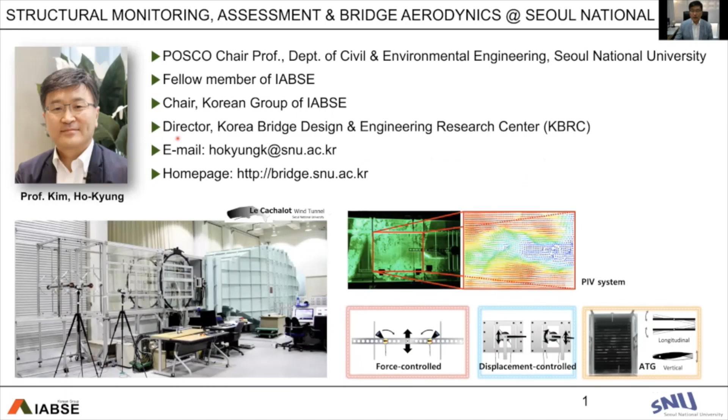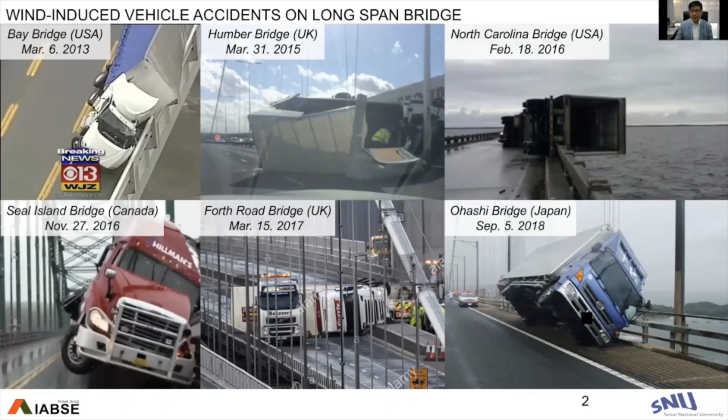Wind-induced vehicle accidents on long-span bridges were identified and observed in many countries. A couple of years ago, Typhoon Jebi struck Japan and rollover accidents were observed at the time.

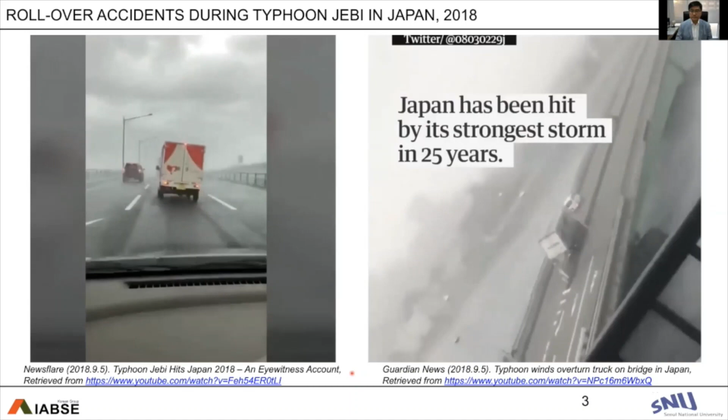The same rollover accidents were also observed in Korea. On the left-hand side, you can see a couple of accidents with a 1 hour interval at almost the same place along the bridge.

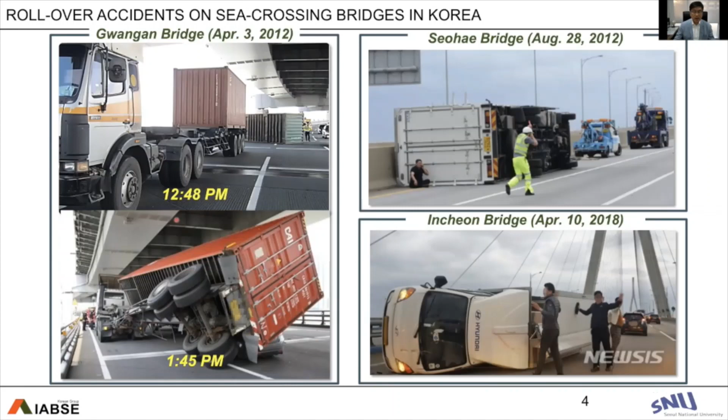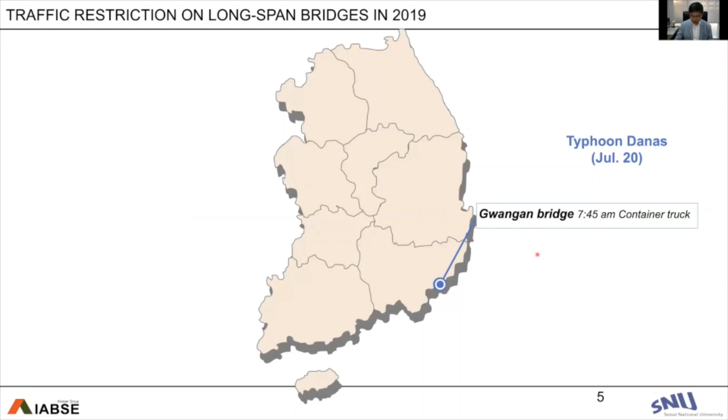Last year, many typhoons struck Korea. In July, due to Typhoon Danas, Gwangan Bridge was temporarily closed. In September, Typhoon Lingling invaded the Korean Peninsula, and the western side coastal area, where there were many long-span bridges, the bridges were closed and reopened as the typhoon moved up to the north side.

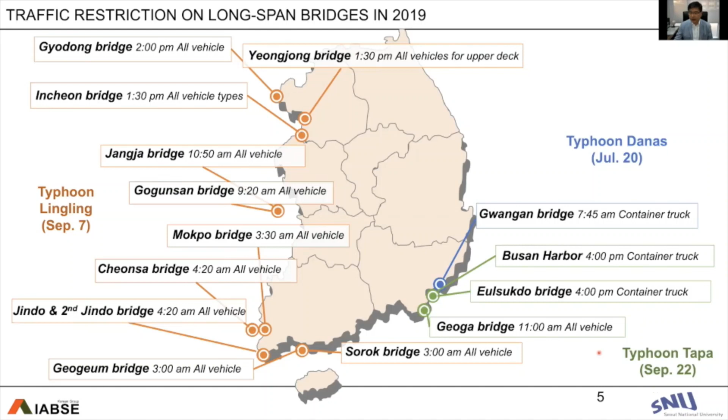Also in September, we had another typhoon, Tapa, in the southern and eastern area of the Korean Peninsula. 10 days later we had one more typhoon, Mitac, and Ulsan Bridge was temporarily closed at the time.

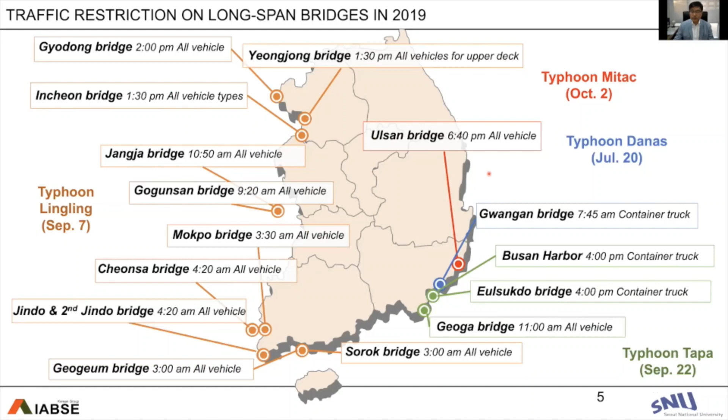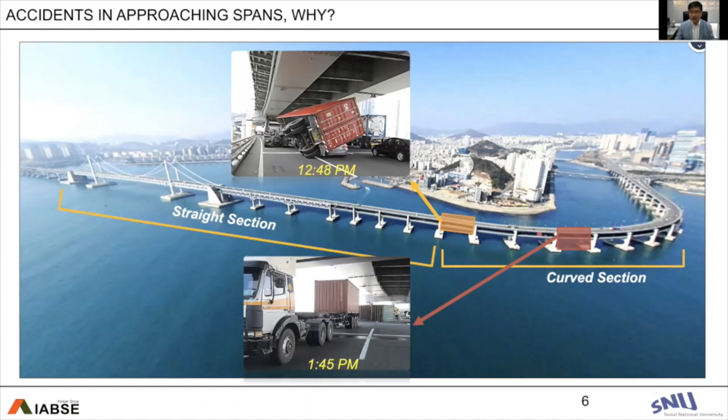The interesting point was that the accident was observed in the approaching spans, not the main span. Also, the accident events were observed in the lower deck, not the upper deck. So that was our motivation for this research, and we would like to provide some framework for vulnerability assessment of vehicles under strong winds.

We implemented 3 research items. The first is wind tunnel testing for measuring aerodynamic coefficients. The second is determining critical wind speed via vehicle simulations.

We would like to obtain critical wind speed curves for each wind direction. For example, in this specific case, you can see the vehicle is most vulnerable to wind from the west direction, with a critical wind speed of around 18 meters per second.

By this way, we can obtain wind speed thresholds for traffic control based on this critical wind speed curve.

The last item is wind environmental analysis. We obtain long-term wind speed data and also develop long-term probability distribution functions. By combining this information with the critical wind speed curve, we can determine a vulnerability index, N subscript E.

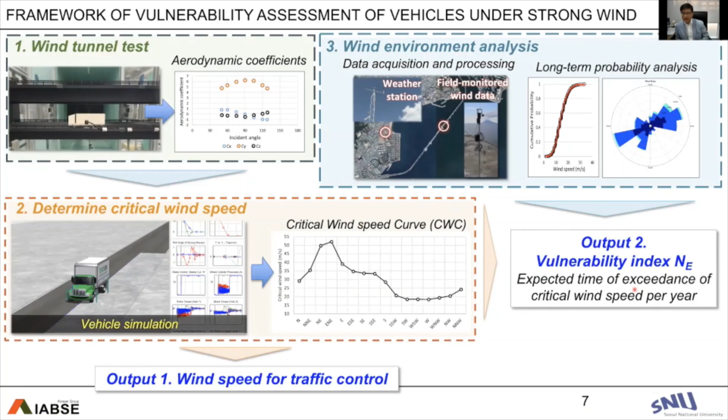This is the expected time of exceedance of critical wind speed per year, which is a sort of risk index.

The Gwangan Bridge provides a total of 8 traffic lanes: 4 lanes on the upper deck for westbound traffic, and 4 lanes on the lower deck for eastbound traffic.

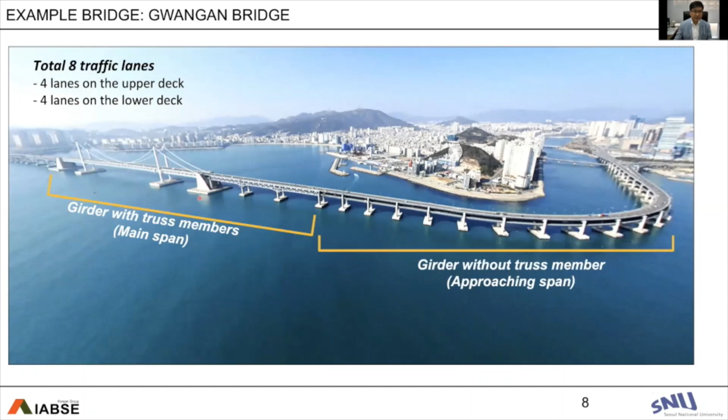As you can see here, the approaching span girder is without truss members, while the main span is equipped with truss members between the upper deck and lower deck.

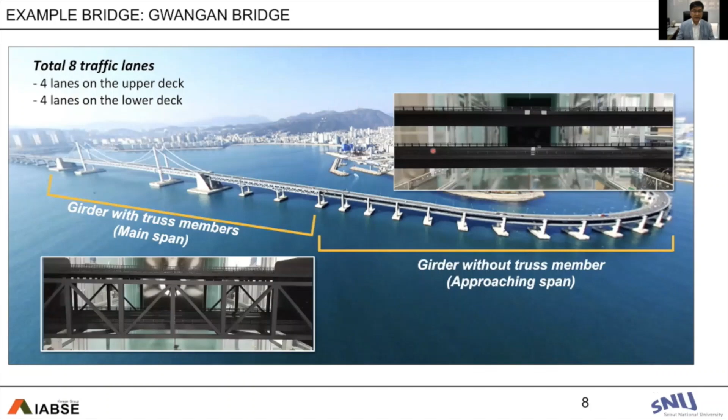For the wind tunnel test, we developed 2 different section models.

Let me talk about step 1, the wind tunnel test to measure the aerodynamic coefficients of the vehicle. We developed a new system so we can rotate the cross section of the bridge deck to control the incident angles.

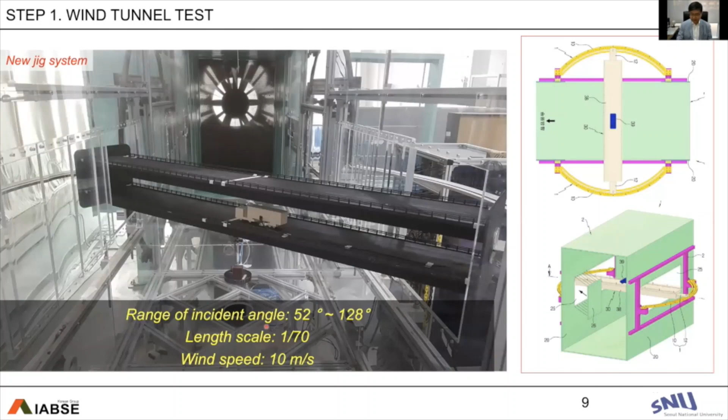By installing small load cells inside the vehicle models, we can measure the aerodynamic loads, 3 forces and 3 moments. Then by changing the incident angles, we can develop aerodynamic coefficients for these specific bridges.

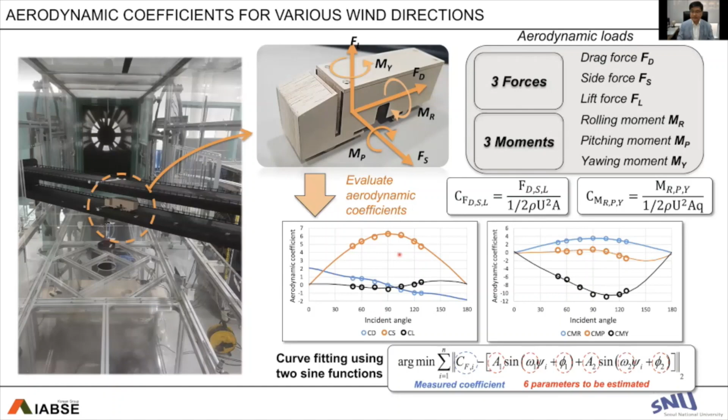This shows us the experimental results of the aerodynamic force of approaching spans, the vehicles on approaching spans. For the upper deck, please note that the dotted line here is the aerodynamic coefficients for the flat ground condition. You can see side force and rolling moment. The level of the aerodynamic force is almost similar to the flat ground condition.

How about the low deck? The low deck is somehow different. The aerodynamic force coefficient somehow increased due to the tunneling effect between the gap, the small gap between the upper deck and low decks.

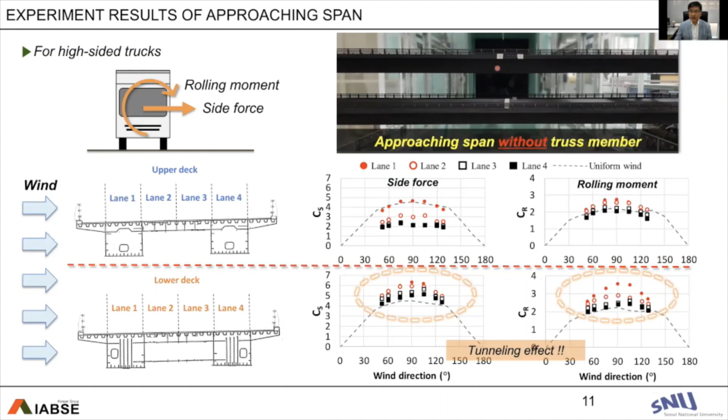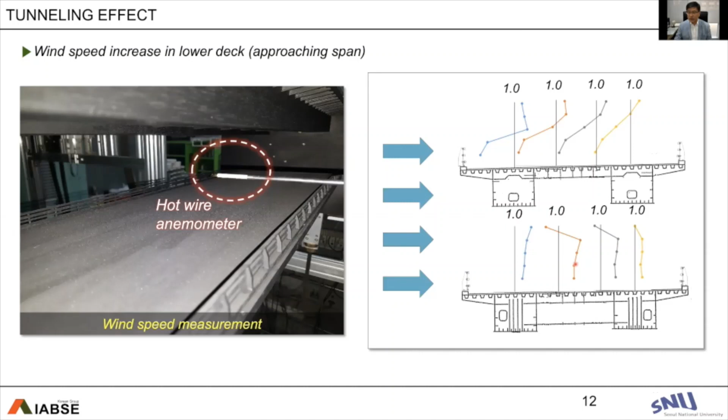We also tried to measure the increased wind speed between upper deck and lower deck using hot wire anemometers in the wind tunnel test. The vertical line denotes the undisturbed wind speed. You can see here on the lower deck, most of the lane, the wind speed was somehow increased.

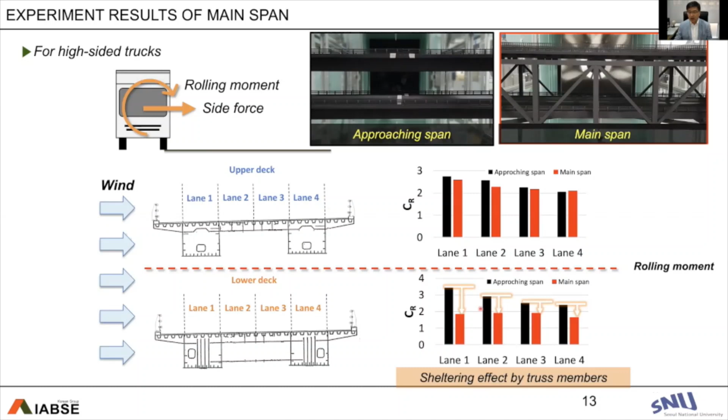We also performed the experiment for the main spans, and you can see the truss members somehow equipped between upper deck and lower deck. For the upper deck, the approaching span and main span provide almost similar aerodynamic coefficient, but for the lower deck, you can see here, main span, the aerodynamic force was pretty much reduced due to the sheltering effect by truss members.

With these measured aerodynamic coefficients, now we can estimate critical wind speed. So we consider two cases of accident: one is overturning, and the other one is side slip.

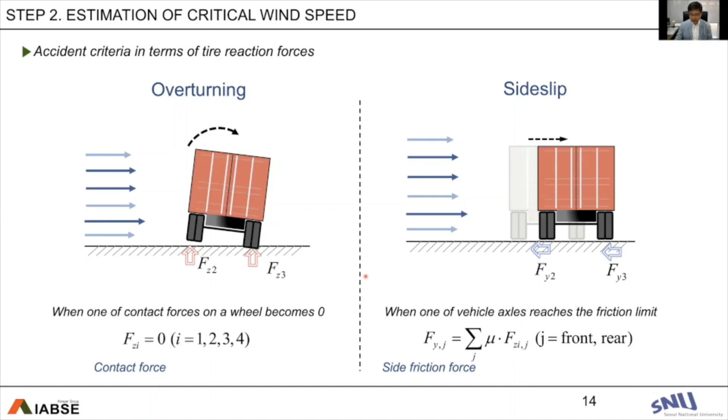Overturning is assumed when one of the contact forces on a wheel becomes zero. Side slip is assumed when one of the vehicle axles reaches the friction limit. So what we need is tire reaction force to check this accident, and for that we need a vehicle dynamics model.

We consider the first model as a quasi-static vehicle model. With this model, we can calculate the tire reaction force from the equilibrium equations as shown here, combined with geometrical constraint.

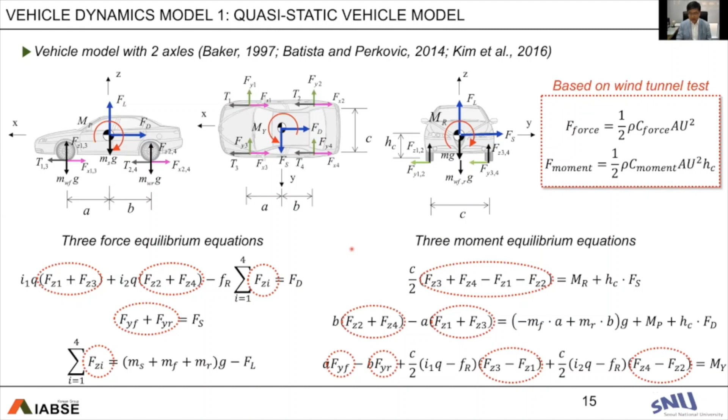The other option for vehicle dynamics is simulation using TRUCKSIM. TRUCKSIM is one of the commercial softwares which deals with vehicle dynamics. By combining it with MATLAB Simulink, we can develop the vehicle motions with these proposed procedures.

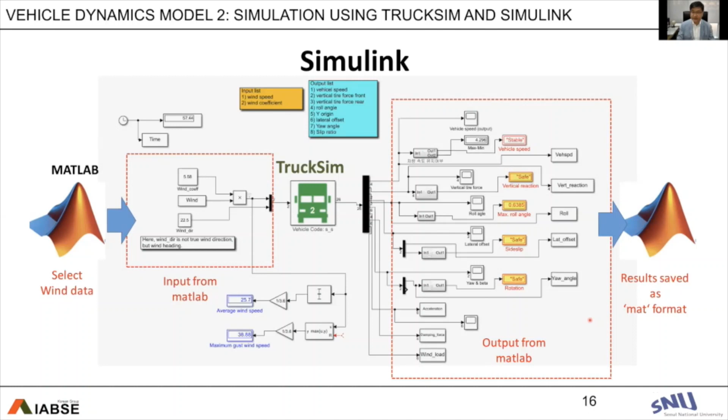To consider the random properties of the wind velocity fluctuations, we developed 100 turbulence time histories for each wind speed, and we feed them into the TRUCKSIM analysis. TRUCKSIM analysis then provides us the vehicle motions according to the turbulent wind.

Then we check the bridge vehicle accident, and eventually we can develop this kind of fragility curve for travel time t. We can get 100 samples by varying a random seed of the wind velocity fluctuation. This cumulative distribution function should be developed for 16 directions and 8 traffic lanes.

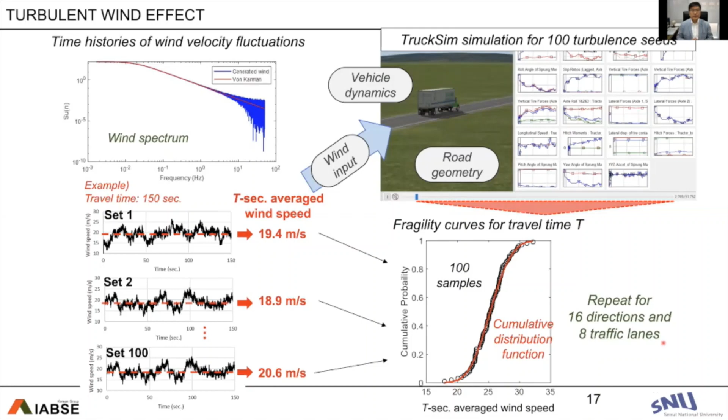This figure shows us one case, and if we develop this kind of fragility curve for vehicle accident, then we have to determine the traffic control wind speed.

For this case, what we need is the definition of the non-exceeding probability to find out the traffic control wind speed, and we just apply 5% in our case. For this specific case, the determined traffic control wind speed will be 22 meters per second.

With these procedures, we can develop critical wind speed curves for each wind direction. We vary wind directions and repeat these procedures, plotting the traffic control wind speed, and eventually we can develop these four curves for each lane of the bridge. As you can see here, the wind speed for traffic control will be 14 meters per second for this specific location along the bridge.

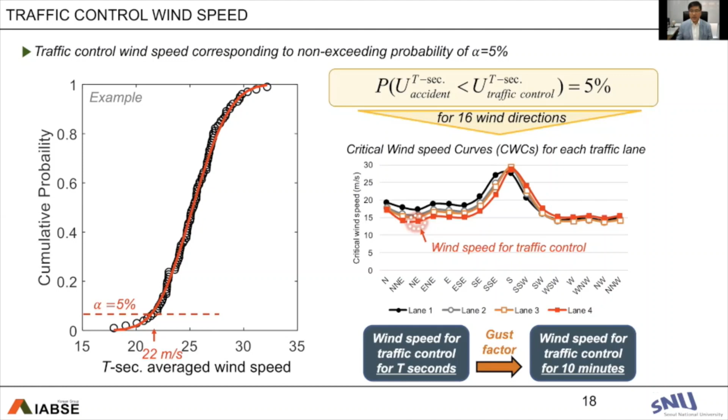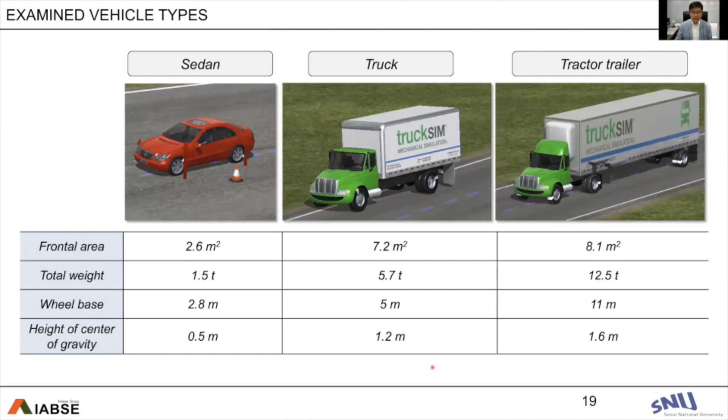By reducing vehicle speed to 40 kilometers per hour, we can increase the traffic control wind speed by 2 meters per second on the lower deck of the approaching spans. That means limiting vehicle speed is somehow helpful to reduce vehicle accidents.

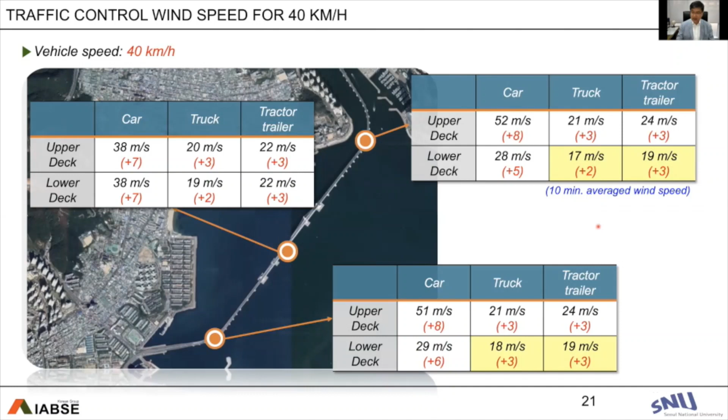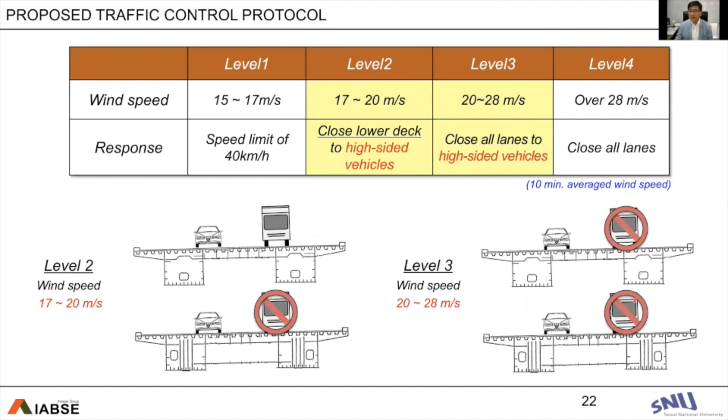Eventually, we propose traffic control protocols for the Gwangan Bridge operators as shown here. We start level 1 from wind speed 15 meters per second, and recommend a speed limit of 40 kilometers per hour. Level 2 starts from 17 meters per second, in terms of 10-minute average wind speed, and for this case we close the low deck to high-sided vehicles. Level 3 starts from 20 meters per second and closes both lanes to high-sided vehicles. From level 4, over 28 meters per second, we close all lanes of the bridge.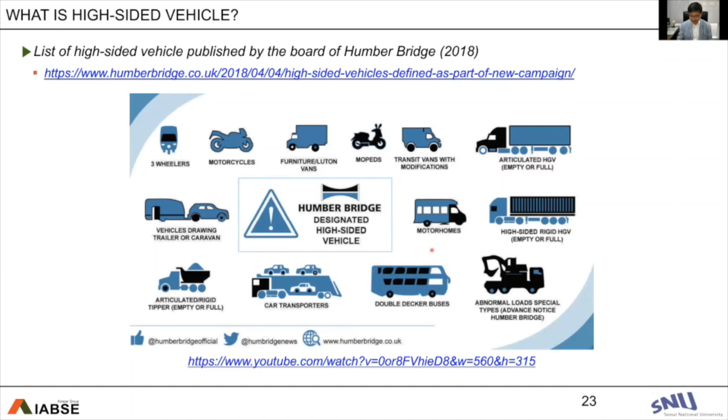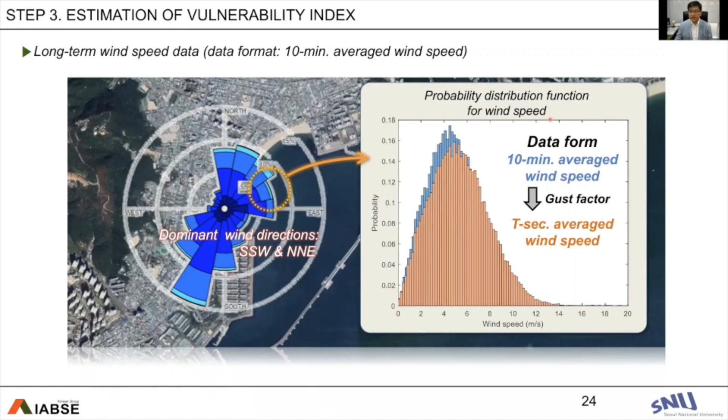We can develop the probability distribution function for wind speed. Based on the probability density function of wind speed for each wind direction, and combining that information with the fragility curve for each wind direction, we can develop the probability of exceeding critical levels during 10 minutes, taking all wind directions into consideration. Eventually, we can develop the vulnerability index, subscript E, defined as the expected number of accidents of critical level in 10 minutes for 1 year. That is a kind of risk index.

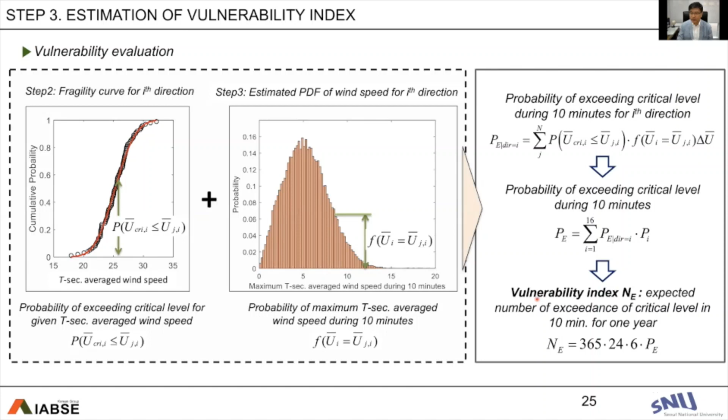We applied this risk index to the upper deck of the Gwangan Bridge. On the approaching spans, the outside lane was most vulnerable, and the vulnerability index reaches around 2. That means a maximum of 2 rollover accidents per year on the upper deck.

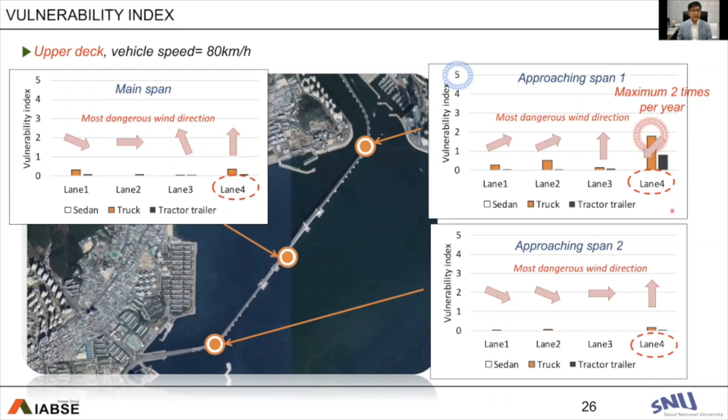How about the lower deck? For the lower deck, the vulnerability index increased significantly compared to the upper deck, reaching around 15. That is a maximum of 15 events per year.

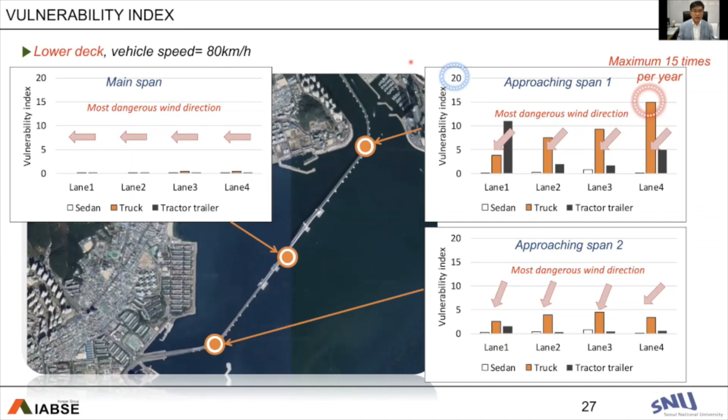So if we reduce the vehicle speed, we can decrease the vulnerability index. But if you would like to keep the vehicle speed at maximum, 80 kilometers per hour, then another option will be installing a windscreen on only the curved sections, this way.

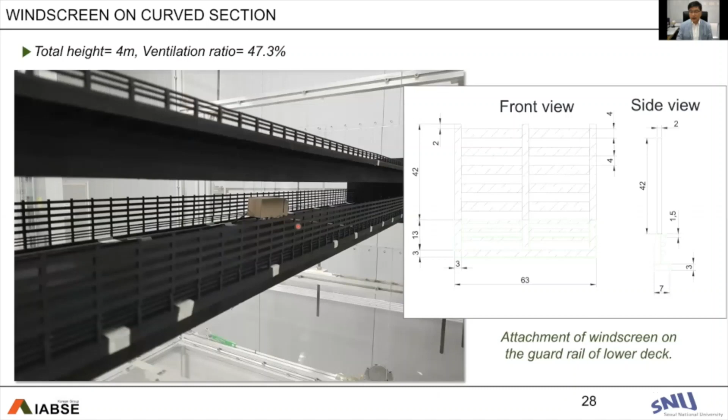We performed wind tunnel tests again to measure the changed aerodynamic forces on the vehicles, and then evaluated the vulnerability index with the windscreen again. We realized that around 85% of the risk index can be reduced by installing the windscreen for the approaching span.

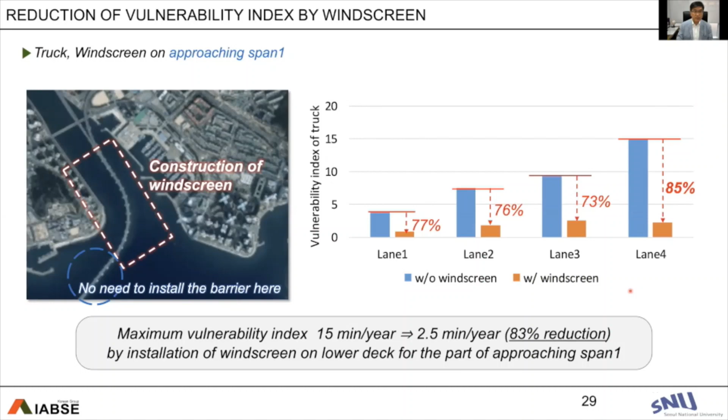While talking with the bridge operator, what they actually needed was prediction of wind speed 1 hour or 2 hours later, to prepare for closing or reopening the bridge after a typhoon. So we tried to develop deep learning based wind speed prediction algorithms, training these models with past typhoon data. We simulate 1 hour or 6 hour predictions in advance.

This is very important information, and once we can provide this kind of tool, the bridge operator can spread information related to driving speed or driving range through the variable message signs of the bridge. In the future, autonomous vehicles should become more popular, and this kind of information can guide vehicles toward safer driving.